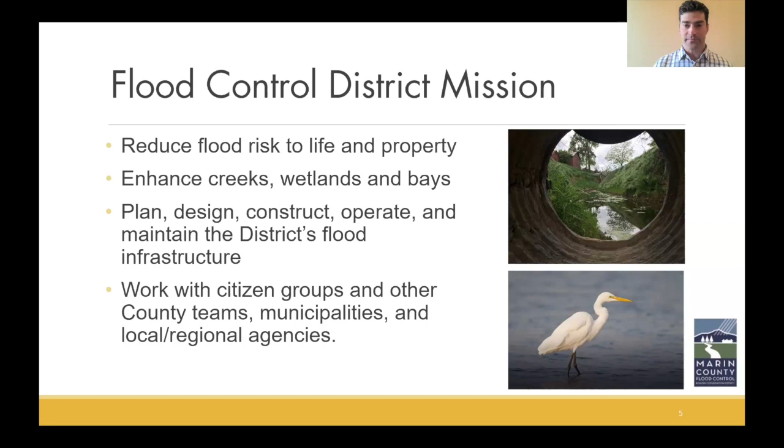Next I'm going to talk a bit about watersheds. In Southern Marin, there's a few watersheds that we have, and this has been organized into 6 specific watersheds. When I'm done describing what a watershed is, Stephanie will chime in and talk about the specifics of these different watersheds. Starting down, we have Marin City, Coyote Creek, Arroyo Corte Madera del Presidio, Ryan Creek, Sutton Manor, also Strawberry, and Bel Aire, serving more of our Tiburon locations.

One thing I wanted to give is a little watershed 101: what a watershed is and how it's defined. It's typically defined at a specific point in a creek system. If you look at that outlet point, the watershed is the area that drains to that one point in the creek system. For instance, in Coyote Creek, you see the mouth of Coyote Creek entering into Richardson's Bay. If you look at that area, when it rains, the runoff will drain off the landscape into the different tributary creeks down into the larger Coyote Creek to that one point. That's how we define a watershed area.

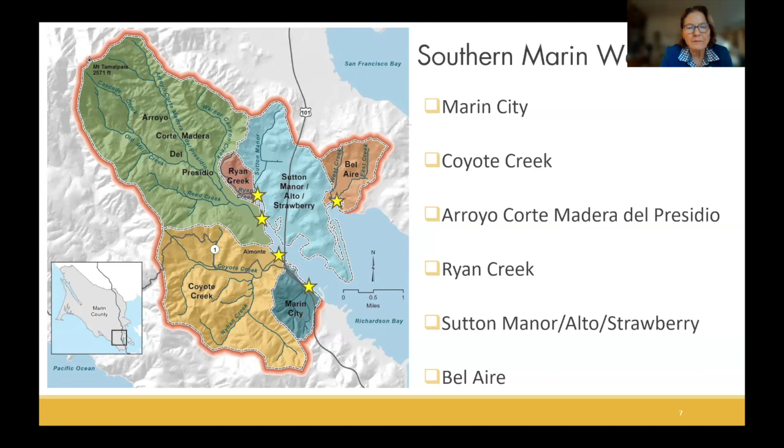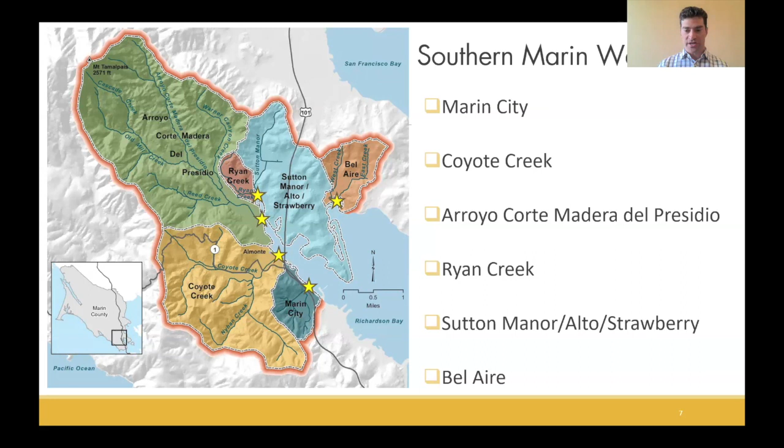Chad, back to you. Thanks, Stephanie. And so this area, all these watersheds, in total, it's 14 square miles of watershed area that we're talking about today.

So one thing, once we understand our watershed, we also, as a flood control district, need to understand rainfall patterns. In this photo schematic, you see storm direction. Mostly our storms are coming from the Pacific Ocean. On the west side of the mountain range of Mount Tam, there tends to be more precipitation because of an orographic lifting effect, where the clouds are gathering on that side of the mountain. And then there's a bit of a rain shadow on the Richardson Bay side, the eastern side. So annual precipitation is somewhere in the 50 inches per year on the west side and 30-something on the east.

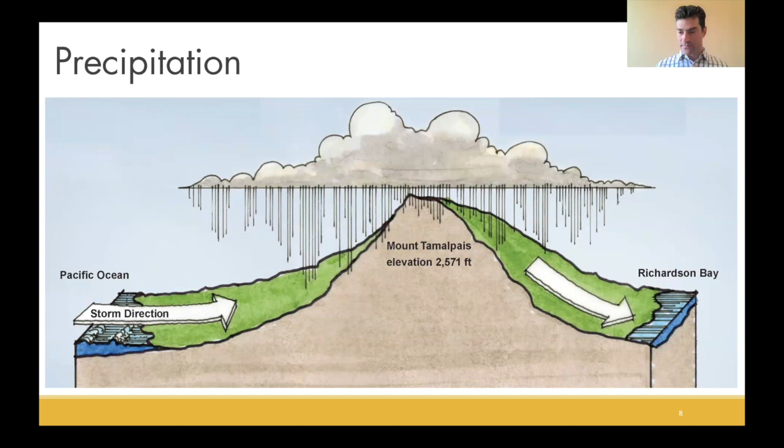So once we have a watershed and it rains on the watershed, we have runoff. If you look at these two artistic renderings of a natural watershed on the left and a more urbanized watershed on the right, when it rains, water will collect on trees and plants, and it'll also soak into the ground. Basically what's left over after those have been saturated and soaked up, and there's still water remaining, is it'll run off into our creek systems. So that term is runoff.

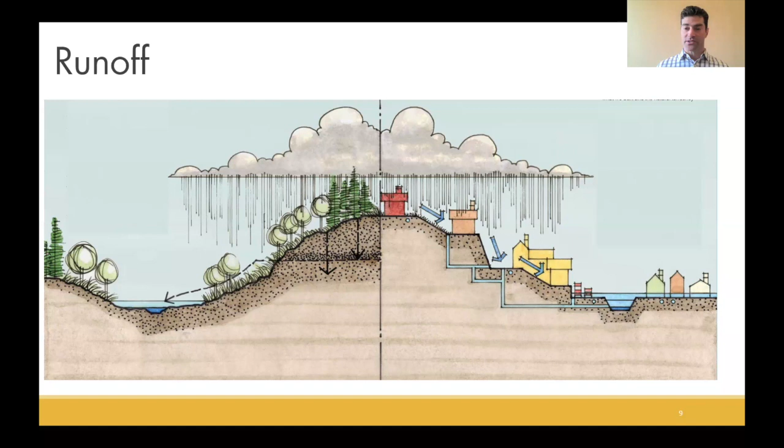So only a percentage of the rainfall actually makes it as runoff. In the urban system, we have more impervious surface, so we have rooftops, streets, sidewalks that don't seep water into the ground as readily. So a higher percentage of that rainfall turns into runoff. That can increase the total magnitude or volumes of runoff during a storm. It can increase the peak flow rate for that particular storm, and it can also reduce the time of concentration, creating flashier systems.

So then corresponding to that, flooding. Flooding is a natural process, and it can actually be a good process when it comes to nature in many ways, to have floodplains flooding every now and then in order to allow for floodplain repairing processes to take place.

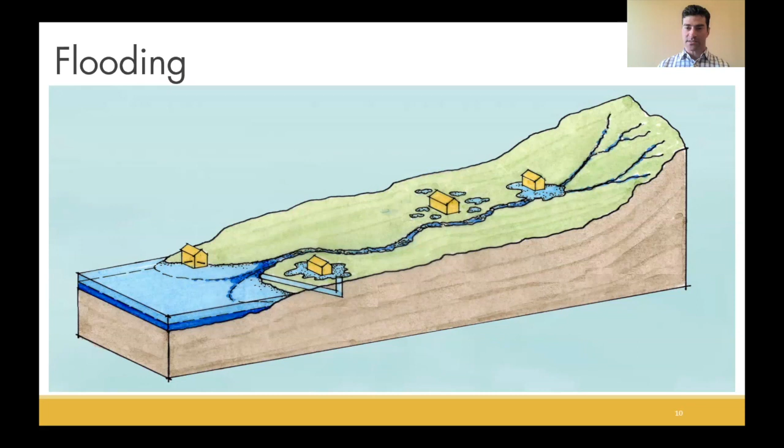I'm going to summarize a few different types of flooding. If we look at the far right, more in the uplands, this is showing creek overflow. That's where if there's such a strong rain event that the creek shape and roughness cannot convey the water within its banks, it may overtop. So then a creek will overflow if there's enough of a flow rate associated with that rainstorm.

Another form of flooding is isolated ponding. That's where there's just not positive drainage, and the water may not readily flow to the creek because it's a natural depression, pools that are formed without drainage.

Next is stormwater overflow, where a storm drain might back up, shown as the third one to the right. That can be caused by a few different things. One is a conveyance deficiency, where say the storm drain pipe itself, even if it's fully clean, pristine pipe, just wasn't built and designed large enough in order to convey a particular flow that's occurring at that moment in time. So you can get backup if the storm drain pipe or channel is too small and cannot convey the water enough.

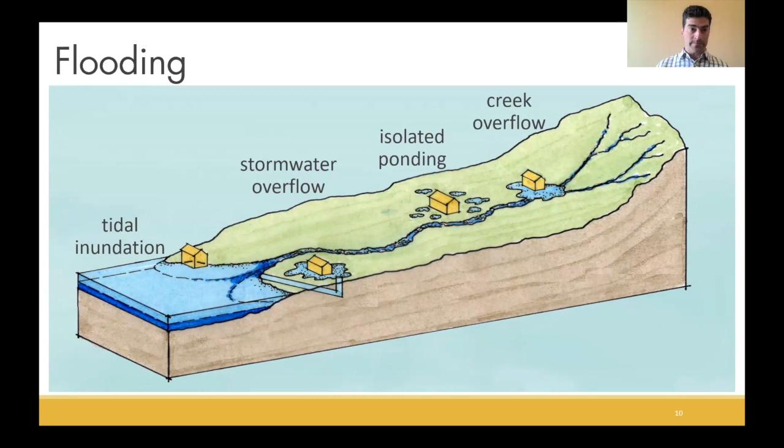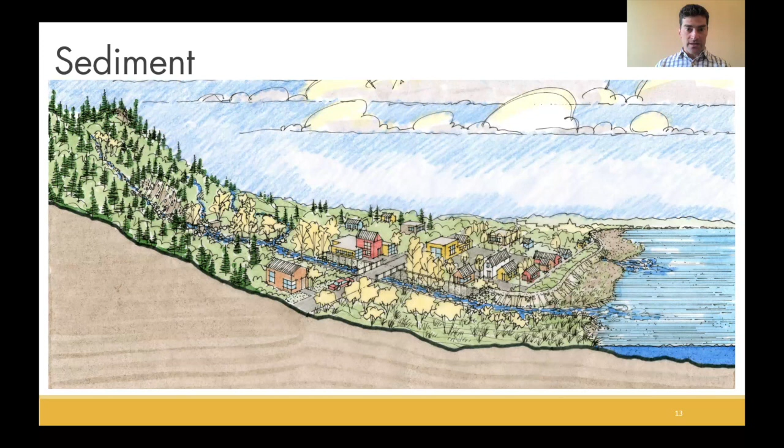I talked a lot about runoff and storm water, but as a geomorphologist, I also think about sediment. If we're looking at a profile of a watershed, there are different zones of sediment. On the far left we have our steep headwaters where there are more landslides, and this is where sediment production occurs. If there's a landslide or rill or gully erosion that feeds sediment into our stream systems, that's a natural process, and in the uplands it's where it naturally occurs.

Then in the middle there's the zone of sediment transport, where within our creeks sediment is largely being conveyed through those systems, carrying the water and sediment down to the bay margins, which is where you'll see more of the depositional regime. That's where on the flats along the bay the water will slow down, and when the terrain flattens out it will deposit sediment. That's actually an issue for certain locations in terms of flood control as well, because sediment builds up, and where sediment builds up it may limit the conveyance capacity of that creek.

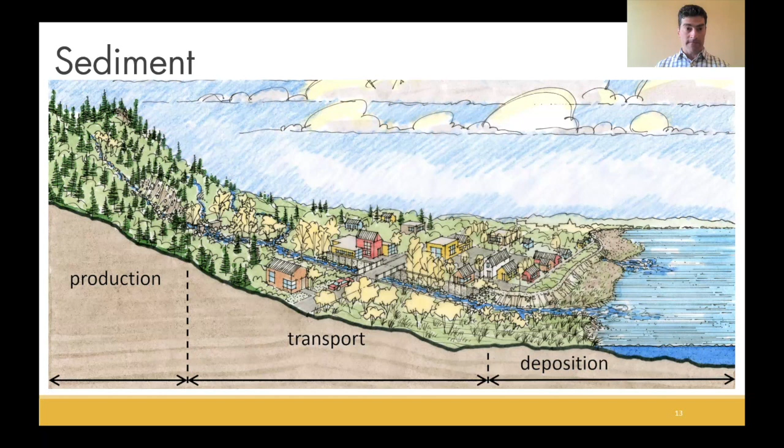So one question is how you can help. As private citizens, one main thing is for property owners to inspect and clear your driveway culverts and drainage prior to a storm. This is important because while the roads maintenance crew is working within the road right-of-way, what happens above and what drains to that road right-of-way matters as well.

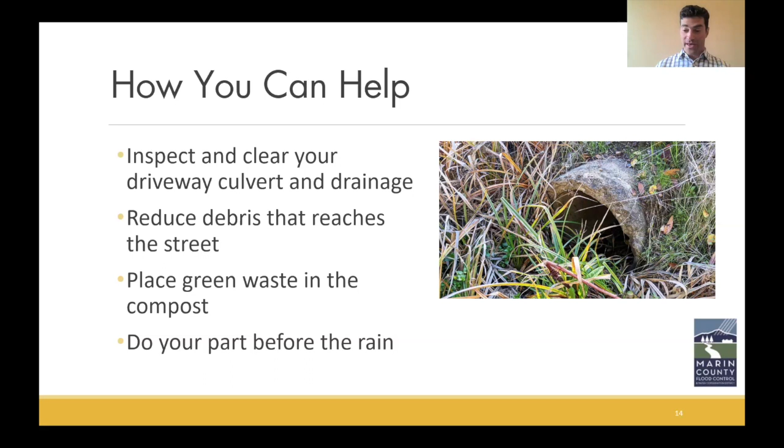So reducing debris that reaches the street is really helpful. Place green waste in your compost rather than scattering it on the landscape or in a concentrated creek or waterway. That's the main time you can contribute, before the rainstorm happens, because once the rain starts it's tough to clear that debris that may build up in the system.

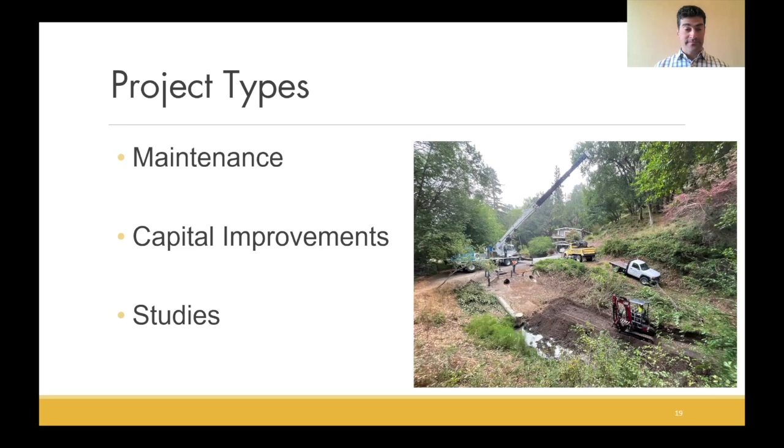There's a number of mechanical parts that need to be maintained. There's also creek and levee maintenance—if we have a certain location that's sensitive, built by the Army Corps of Engineers for instance, for Coyote Creek, we need to make sure it's not getting overgrown, increasing the roughness. Overgrowth is great for habitat, but sometimes it can be difficult for flood conveyance. So if we're really relying on a particular channel for flood conveyance, we'll need to clear out vegetation.

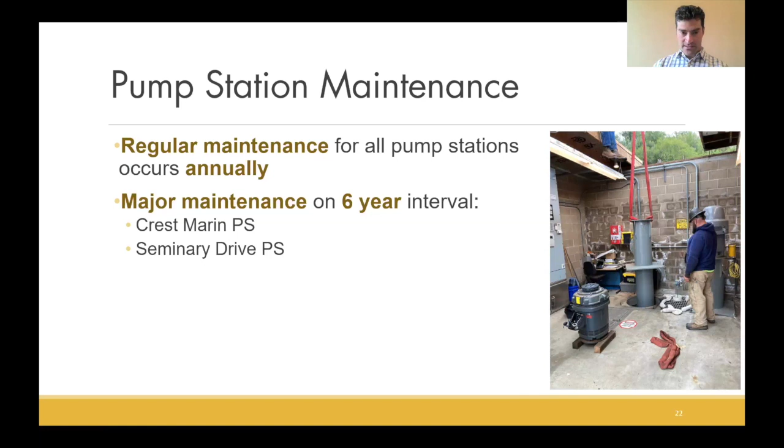For pump station maintenance, you see a photo here on the right where they're doing maintenance in the wet wells for these pumps. We have regular maintenance for all of our pump stations that occurs annually, and major maintenance on 6-year intervals. Coming up, we have maintenance scheduled for Crest Marin pump station and Seminary Drive pump station, which I believe is to occur this coming summer.

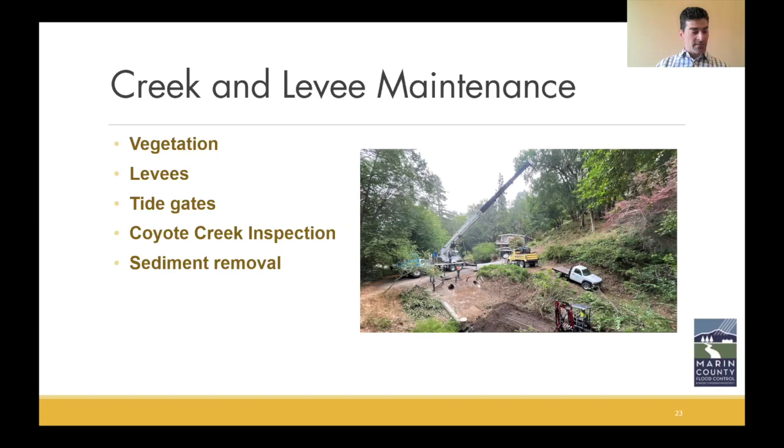Next is creek and levee maintenance—things like clearing vegetation, making sure levees are intact with no excess erosion, making sure they're mowed in the spring, and that rodent burrows are filled twice in the summertime. Tide gates are maintained, at least the ones the district owns and operates, and repaired and replaced as needed. Every other year, the Army Corps of Engineers completes an inspection of Coyote Creek and related facilities built for the project they helped fund. There's also sediment removal, scheduled this summer in East and West Creeks and in Coyote Creek.

Next, I'll move on to capital improvements. For capital improvements within flood zone 3, we have Marin City Pond Pump Station, planned for construction in 2026, I believe, an important project to alleviate flooding in Marin City. There's also a planned dredge of that pond. There's the Crest Marin Pump Station Rehabilitation Project, which I'll talk about in more detail, Cardinal Levee Seepage Mitigation, Coyote Creek to Bothin Marsh Dredge Project, and in Flood Zone 4, East and West Creek Restoration.

I also want to highlight the ongoing Caltrans project. They're in the planning stages for the Manzanita Highway 101 improvements, mostly focused on sea level rise.

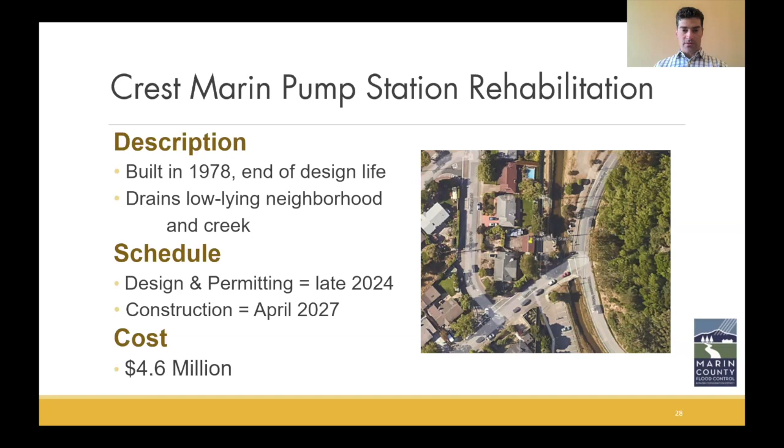Next, I'm going to talk about Crest Marin Pump Station. This pump station was built in 1978, so it's at the end of its design life currently. It drains a low-lying neighborhood and the creek system. It's scheduled for design and permitting in late 2024, construction in April of 2027, and the cost is close to $5 million. This is a zoom in of the outlet of the pump station, I believe.

Next is the Cardinal Levee seepage mitigation project. This project is to replace 1,100 feet of levee on Coyote Creek. It's to address seepage issues due to rodents that naturally burrow in this area. It's scheduled for design and permitting in late 2024 and construction in 2026. The estimated construction cost is just over $3 million.

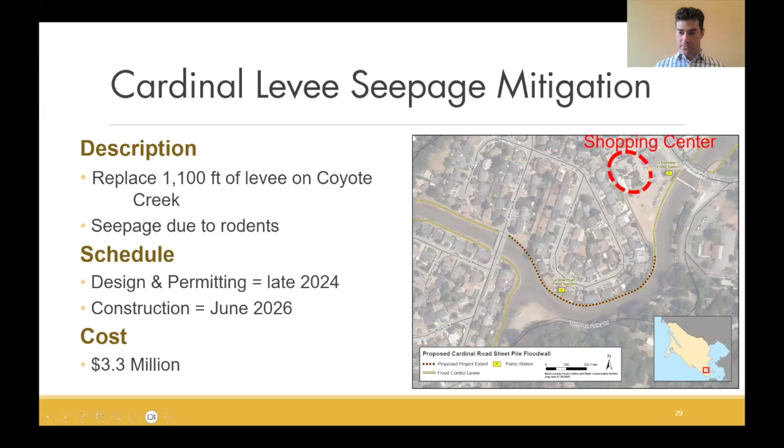Next, I'm going to talk about some of our planning level studies and master plans. Ongoing right now is the Marin City Stormwater Plan, which I am the project manager for. The Manzanita area flood reduction study was recently completed and has fed into what Caltrans is doing for the larger Manzanita project. And then there's the Tamalpais Valley interior drainage modeling.

This will be looking at, within the Coyote Creek systems, the low-lying systems, the interior drainage - so looking at the storm drain system that feeds our 3 main pump stations for that area, and how we can improve the interior drainage, maybe upsize pipes or reroute things to reduce flood risk and the duration and frequency of flooding in those low-lying areas. Basically trying to get water to our pump stations faster and in a more efficient manner.

We're also working on a hydrology and hydraulics manual. That's an ongoing project. There are hydrology standards that the county has had, but they're a bit out of date, so this will be an update to that.

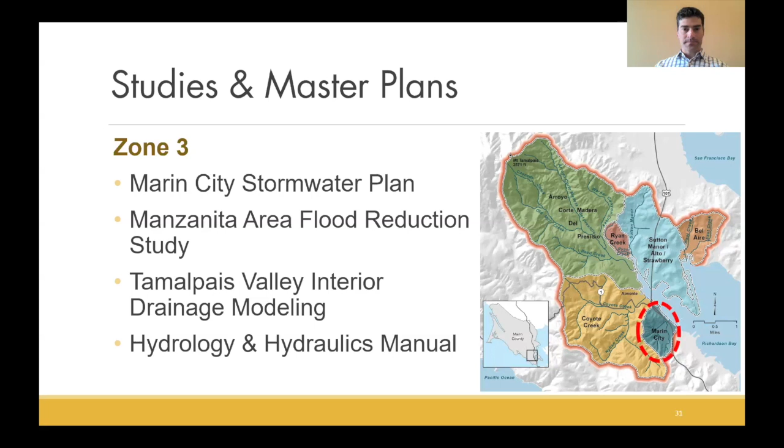I'm going to talk a little bit more about the Marin City Stormwater Plan as an example of one of these planning level studies. We have this project in order to identify future projects to protect public access during flood events.

As some of you know, Marin City only has one entrance and exit. At the Drake and Donahue intersections and the Highway 101 off-ramp, there has been frequent flooding in the past, which has affected people being able to get in and out of Marin City. So we're identifying projects, recommending and prioritizing improvements to reduce flood risk. And when I say reduce flood risk, it doesn't mean we're eliminating all flooding - it's that the flooding that does occur will occur in less magnitude and less frequently.

We're also improving effectiveness of flood management operations and integrating with the Caltrans planning that's ongoing with the nearby Manzanita project. Once we have a list of these projects, it's good to have a master plan so that we can attract funding and so that we, as the flood control district, can stand side by side as advocates for these projects with the community members. That's a real emphasis.

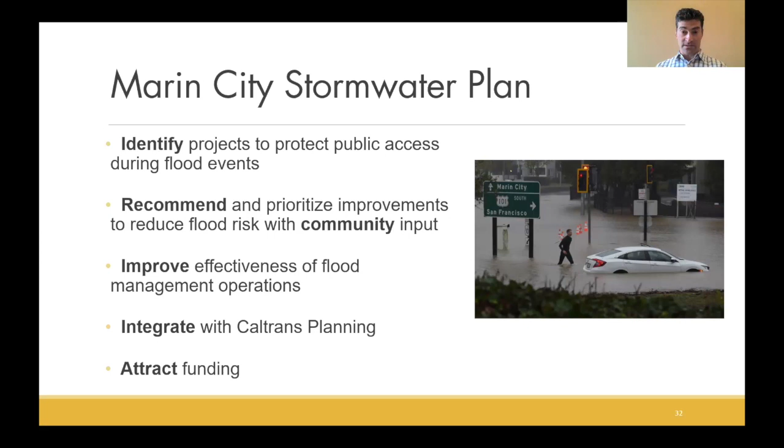Repair cracks - that's another condition deficiency, a structural deficiency we want to improve, by sealing these cracks. In some cases we may need to replace certain segments of pipe if it has fully collapsed, for example.

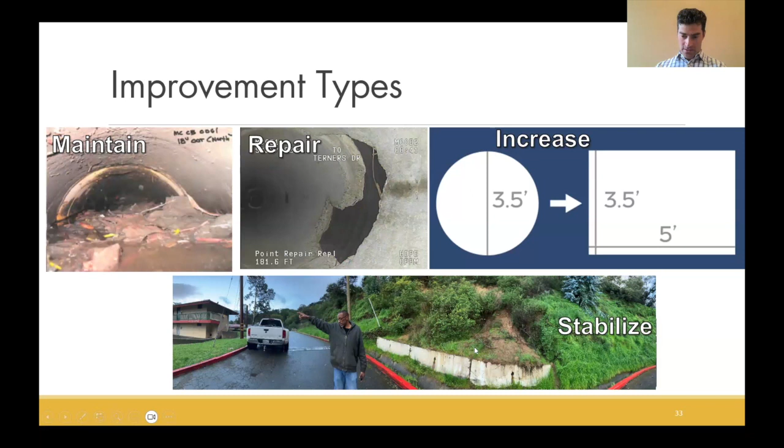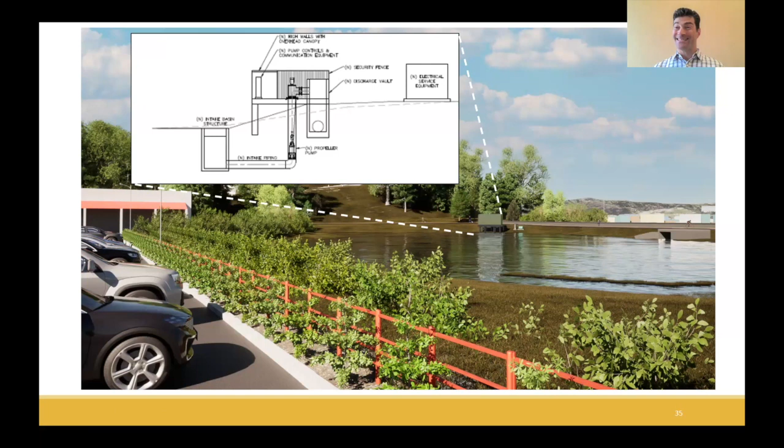The tide level in the bay is very much connected to the water level in the pond. And also if there's a higher water level, high tide, that water backs up into our storm drain system as well. So this project would allow us to, in some ways, isolate the bay from the drainage system and allow us to pump storm water out when it rains, and even pump some of the water that's in the pond. When we have a forecasted storm coming, we can pump it in anticipation of more runoff to come.

So in addition to those technical solutions, a big part of the Marin City stormwater plan is community communication. As I mentioned before, at the end of this process we're going to have a list of projects, and we're prioritizing those projects. We're trying to go through the process step by step with the community so they understand what we're doing and why we're doing it, so that when we go after funding, the community is on board and as a stakeholder and important partner in seeking those funds to improve flood control.

Next I'm going to talk a bit about climate change and sea level rise. So the effects of climate change are threefold. There are many effects, but when it comes to flood control and flooding, one is the potential for increased rainfall intensity - so that may be stronger atmospheric rivers that really drive flooding in Marin County.

Also sea level rise - as the glaciers melt, we know that one possibility is that the sea level will rise, or there's debate as to the rate at which the sea will rise, but we need to plan ahead for that. And then also wildfire potential is a big effect. That comes into play not only because fire itself is a hazard, but in terms of flooding, after the next wet season following a fire you have less vegetation holding the ground in place and a lot more erosion. That erosion can clog our storm drain conveyance systems and cause more flooding.

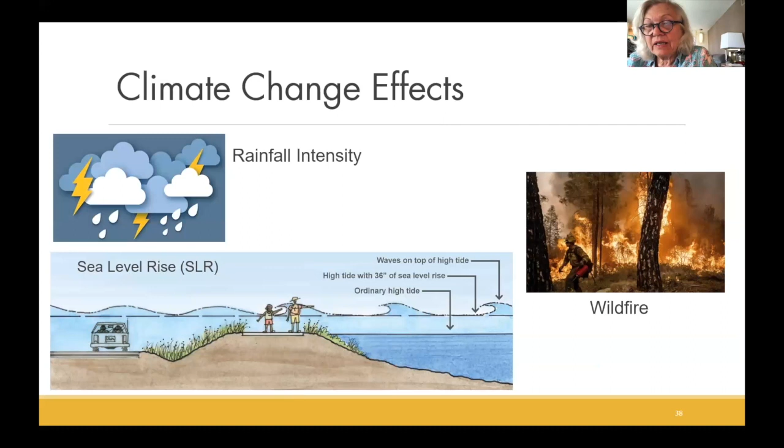I see that Mill Valley's Director of Public Works, Andrew Poster, is online, and he would have more detail. But from my time on the council, the city of Mill Valley has done a lot of work on evacuation planning with the fire department and public works. They communicate with neighborhoods and direct people to proper routes. We've opened up Hamilton Drive sometimes to move people out of town, but the city and I are very cognizant that you have just two ways in and out. Many areas in Marin have only one way in and out, because of our terrain with valleys and hillsides, this is common for a valley or a peninsula like Tiburon. So planning for evacuation notifications is really our first line of defense.

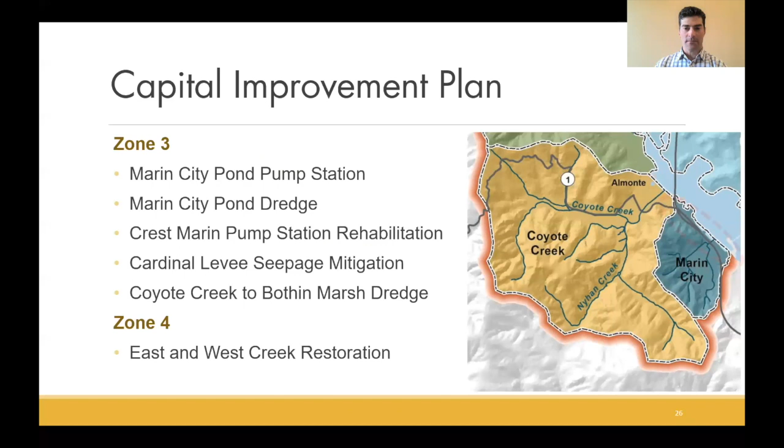Let me go to that slide. The main difference is we're trying to cut off seepage issues with a sheet pile. It'll look similar at the surface, but those sheet piles will go lower down to cut off pathways for seepage between the neighborhood side and the creek side. So it may look fairly similar at the surface, but the main improvements will be underneath the ground.

Okay, and Andrew wants to say thank you for a thorough presentation and your time.

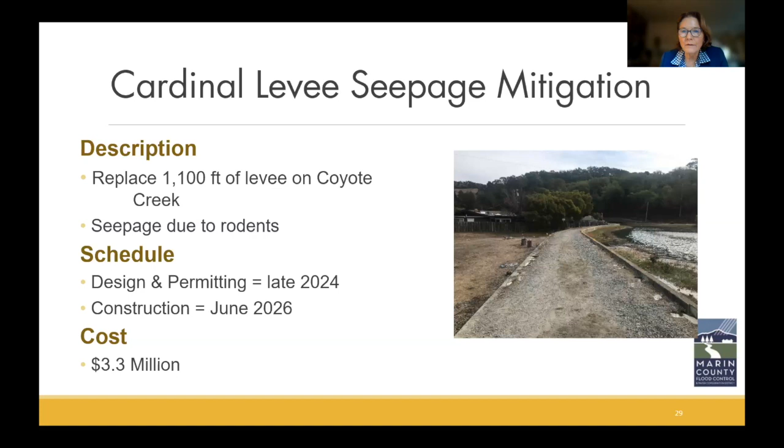Jeff asks, are there any new tide gates being considered along Richardson Bay, particularly near East Blithedale and Alto Sutton? That was helpful for me to hear, since I haven't heard that issue before. Tide gates and tide gate operation are an issue up and down our bay corridor. Judd, any additional information on the Blithedale tide gates? I'm not as aware of all the flooding issues at Blithedale, but I'm happy to look into them. We'll take that one back. Thank you for that.

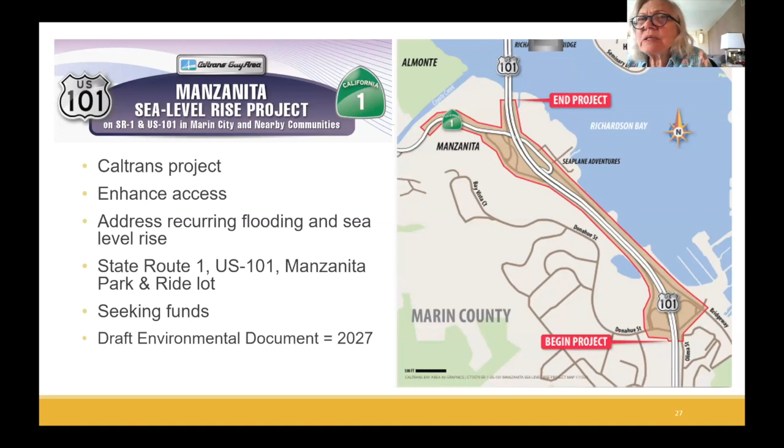The flooding map for Zone 4 does not indicate the flooding that the Marin shoreline vulnerability assessment indicated. Can you explain? It was not an intentional ignoring, I can tell you that. We'll go back and look at that too. We have a flood zone 4 meeting coming up in Carolyn's part of town in Tiburon, and I'm going to look for that date, but we can look more closely at that then.

Any thoughts towards making culverts bottomless and large enough to allow for wildlife corridors? Also, there's a challenge with removing headwater vegetation for fire mitigation while keeping vegetation to slow the flow for flood mitigation. Comments?

Sure. In terms of the improvements we're making, we have a good list in our capital improvement program of the most essential projects that will reduce flood risk in our communities. Where there's opportunity to enlarge culverts, we're mainly focused on flood control, making sure the flood risk is reduced for our neighborhoods. But I am managing one project in particular in China Camp, where we're looking at not only the minimum culvert size needed to convey flow, but also allowing for tidal flushing for natural processes for the inland wetlands. So that's definitely under consideration wherever we're looking to upsize a road culvert, we'll look at the potential for that as well.

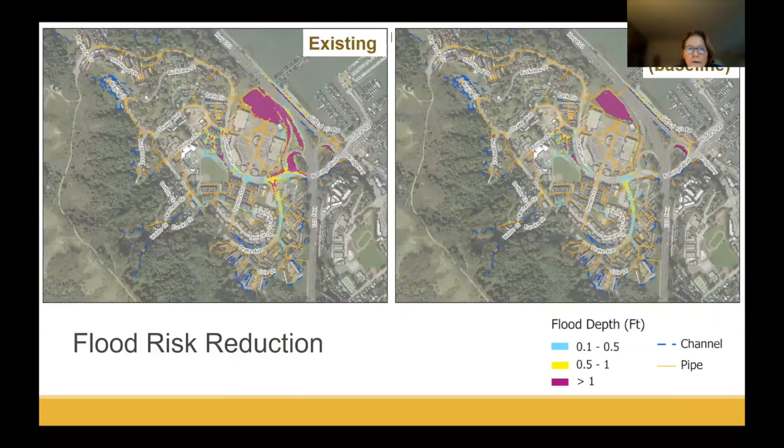That's a very current question. I can tell you that in flood zone 3, we are working with the city of Mill Valley right now to revisit some of the way that the flood revenues are distributed among all the watersheds. So staying in conversation with the communities that are part of the flood district, and being responsive to their concerns and the projects and issues that are important to them, is a way to avoid some of this.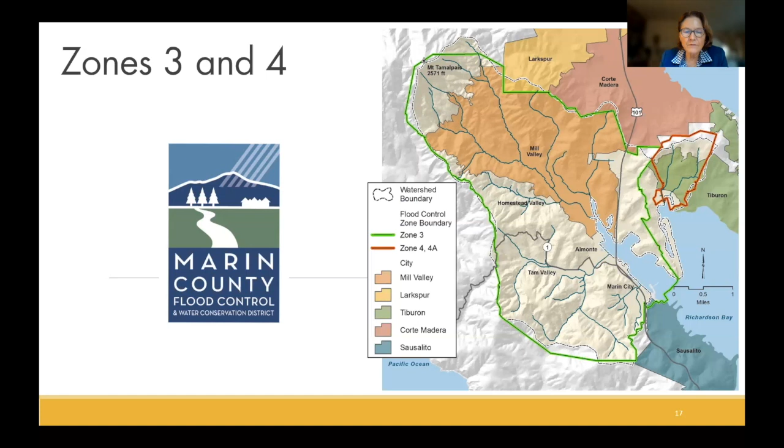I will say flood zone 8, Ross Valley, is probably the most complicated flood district in the county, in that you have several cities and unincorporated areas which all need to say yes to every flood project. That's very difficult to build that kind of consensus, especially when projects take years to deliver. So there's some work to reset a plan for that area that everyone can buy into, and see if we can keep the momentum going there. Not an easy thing to do, not easy to balance all the interests in Southern Marin either, but I know everybody's committed to work on it together.

Okay, another question from Jeff. Are there any issues with habitat protection and endangered species presenting challenges to the efforts regarding flood control?

In many cases, we in Marin enjoy the natural resources associated with our waterways. In terms of environmental permitting, we need to go through the steps in order to have a project that addresses all the impacts associated with an improvement to infrastructure and how that could impact our natural environment. So what we're finding is that more and more resources are being put towards that environmental permitting step, and it's not something that's common only in Marin County, but throughout the Bay Area and throughout California. In order to protect our environment and have better flood control, any project that's in and near our creek systems and the bay takes more time and effort in order to account for those impacts and mitigate them. So yes, it can extend project timelines primarily.

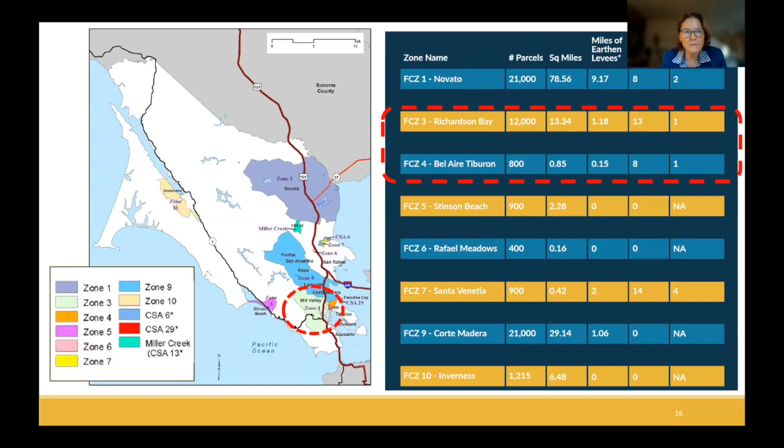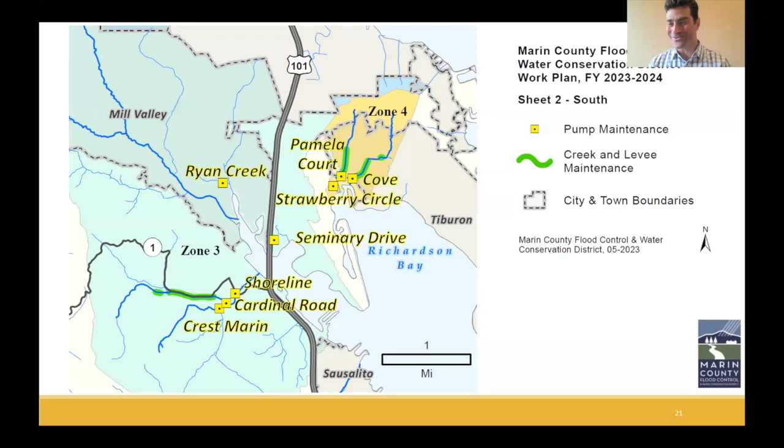I think, Judd, you might have answered this earlier, but another question was: is there an assumption of the actual rising sea in the next 10 to 20, 30 years been announced or acknowledged? I think there's constantly new research and literature coming out in terms of what the forecasts are, the rate of reduction in the ice sheets on above land in Greenland and all of that. It's an ongoing science. Let me suggest, Susan, that you invite Judd and me and some other people working on sea level rise back next year. We'll have had a full year of studying sea level rise and how to get better organized for it in this county, and I think we'll have a little more information for you at that time.

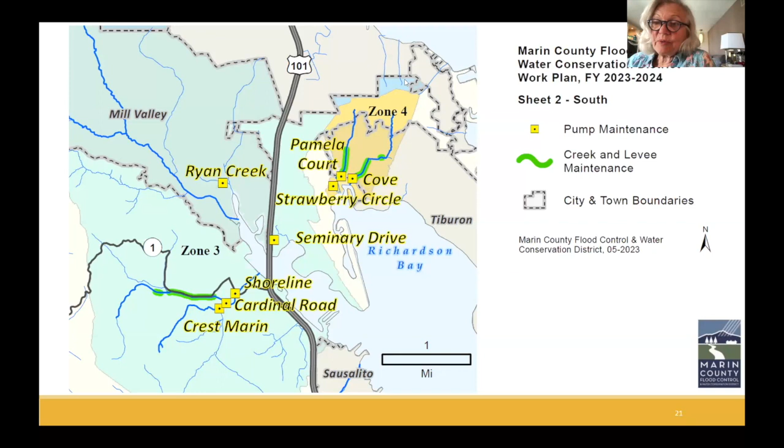That's fantastic. Well, I certainly appreciate all the time and effort you put into this presentation, and yes, it'd be great to have you come back with more information under your belt next year. I appreciate everybody that participated. I hope you felt it was as good as I did. Thank you again.